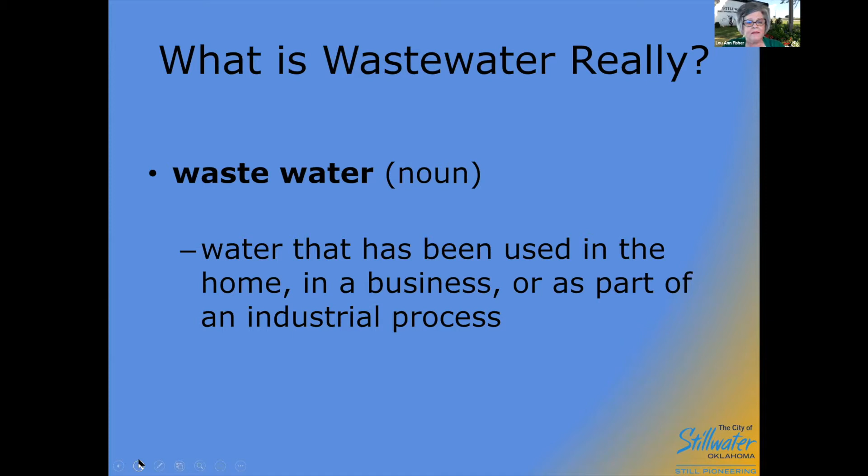Where does it come from? It comes from single-family homes, apartments, and any non-business. So it's divided into two categories, domestic and non-domestic. EPA considers domestic an exempt source of pollution, whereas non-domestic—small businesses, medical facilities, auto body shops, food services, photo processing industry—the list goes on and on.

They are considered to be a possible source of pollution, and there are rules and regulations put in place to govern their discharge to any municipality or waters of the state.

So where does it go? I think everybody's familiar with flushing the toilet, taking a shower, washing machine discharge.

Watering your lawn doesn't necessarily go to the wastewater collection system. It goes to the stormwater collection system. Some cities have combined sewer and stormwater systems, but Stillwater's is not. It goes into the collection system and then runs through different pipes all the way out to what we call a wastewater treatment plant.

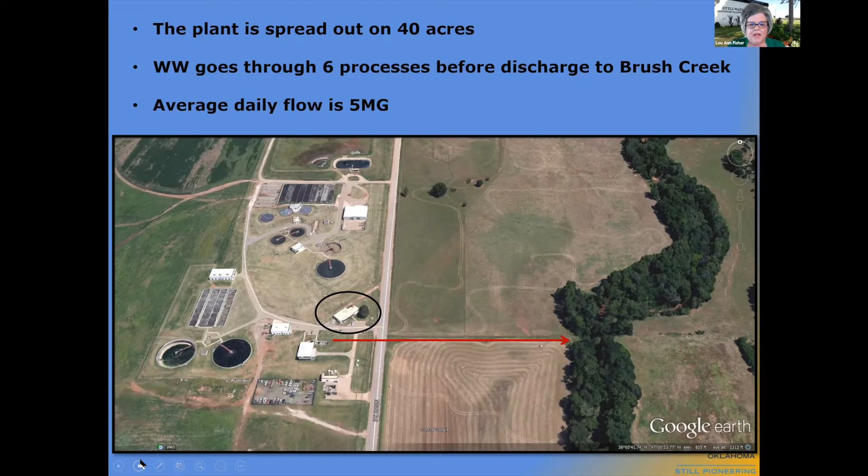Then the next thing would be the aeration tank. That's where all of the microbes are. That is the center of all the treatment processes—the most important. Well, they're all important, but that's the most important because that's where the bugs live. You might have heard me singing about the bugs being happy. The entire set of processes, the entire treatment train, is dependent upon those bugs being happy. When they're happy, there's a proper pH, a proper temperature, a proper amount of bugs of different types. And when it gets imbalanced, it starts acting up, and then the rest of the plant will also start acting up.

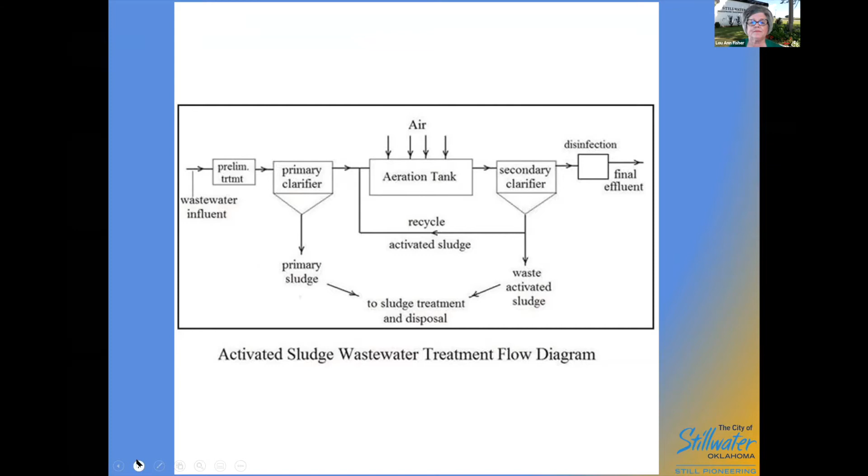Here's an aerial view. The two lines with the little black arrows are the pipes that come into the plant. One comes from the northeast and one from the southwest. The northeast is a 42-inch pipe and the southwest is a 36-inch pipe. They come into what we call the Headworks, which is the very first process that begins the train of processes.

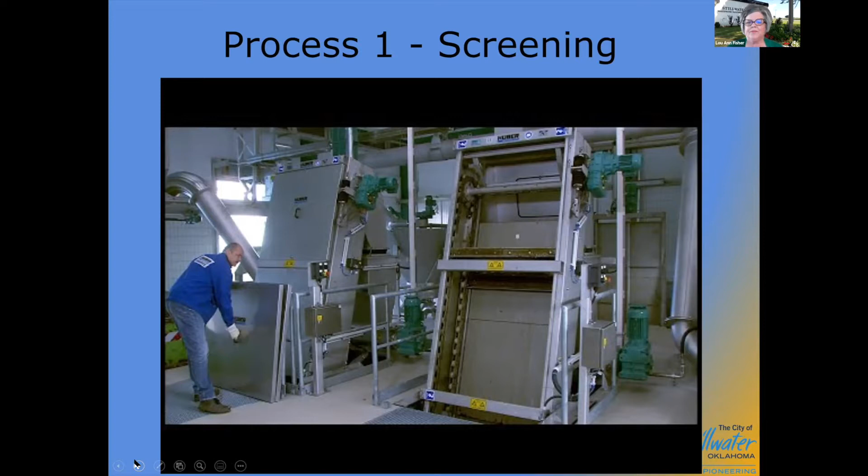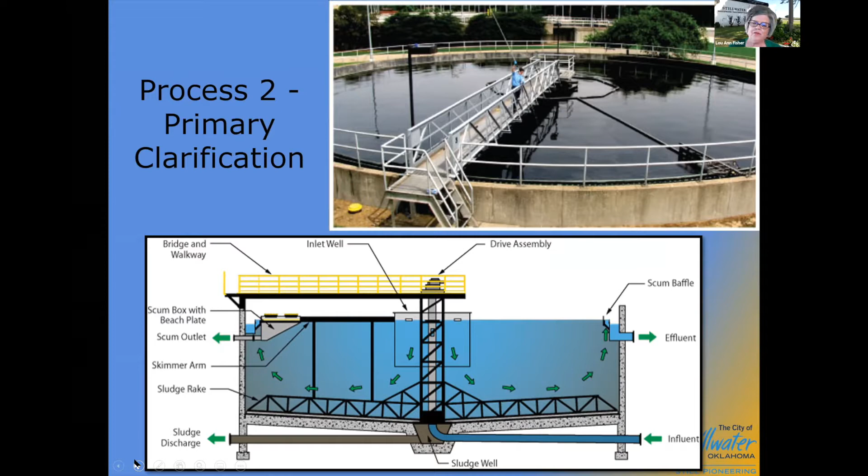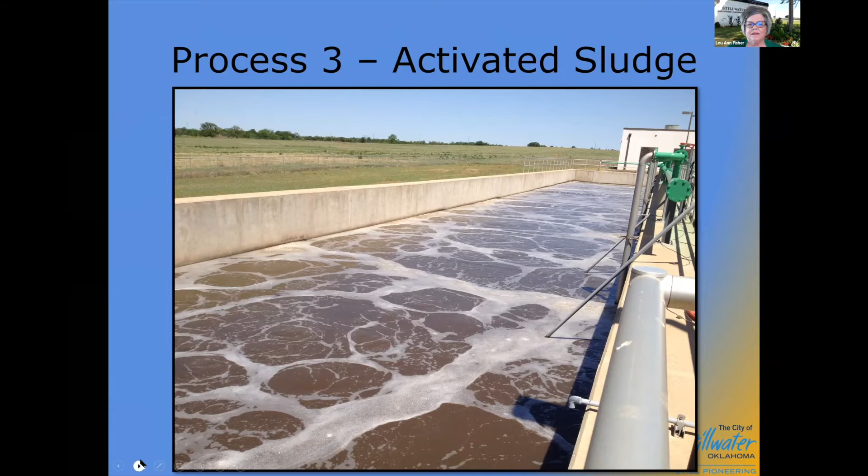Final clarification operates the same as primary clarification, except you keep a sludge blanket on the bottom, trying to keep it about 3 feet in height. It's kind of a buffer. So we have what we call return and waste activated sludge pumps—we'll draw out some of the old sludge and put in some of the new sludge. It's a continual process we do 24 hours a day, 365 days a year.

Next slide. Hey, Lou Ann. Yes. Can I pause you right there? We had a question that I think is important. All right, let's do it. Can you just quickly tell us what you mean by bugs?

Microbes—they're seen under the microscope. These microbes aren't new, added to the wastewater to do the treatment; they actually come from us. They're already in our system, and the processes that allow the water to be cleaned at the treatment plant use the same bugs that are already there coming into the plant. The trick is to keep a balance. There are 5 popular bugs that break down and process the waste, and it takes a certain balance. You don't want to get too heavy on stalked ciliates or too heavy on rotifers. You want an equal balance so they can work together as a team to break down the solids. Does that answer the question?

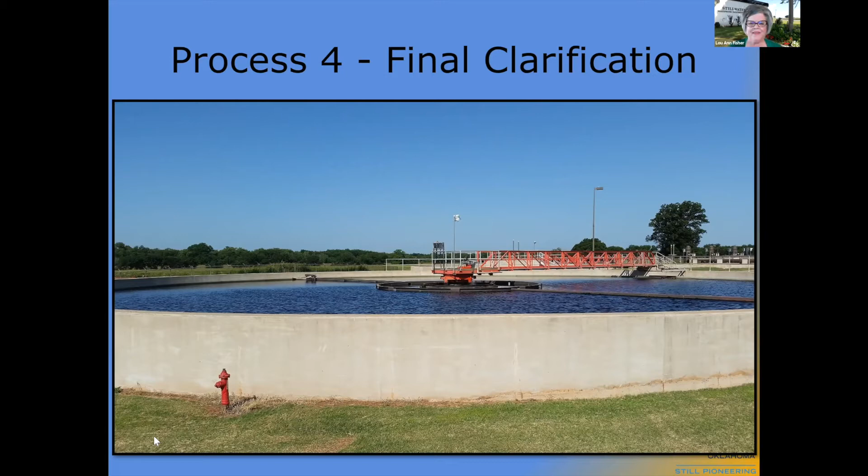Okay, all right then. So this is the last, well, not the last process, next to the last.

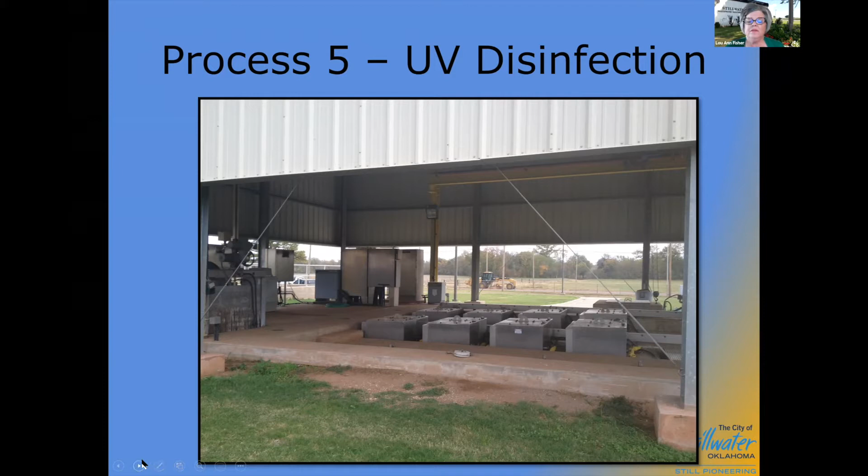These are the UV lamp units. There are 2 channels that the water flows through, and they get UV disinfection. The Stillwater plant was actually one of the first in the state to ever have UV disinfection. It's had UV disinfection since probably the 70s, which was something new at the time, rather than the chlorine gas treatment that disinfected the wastewater.

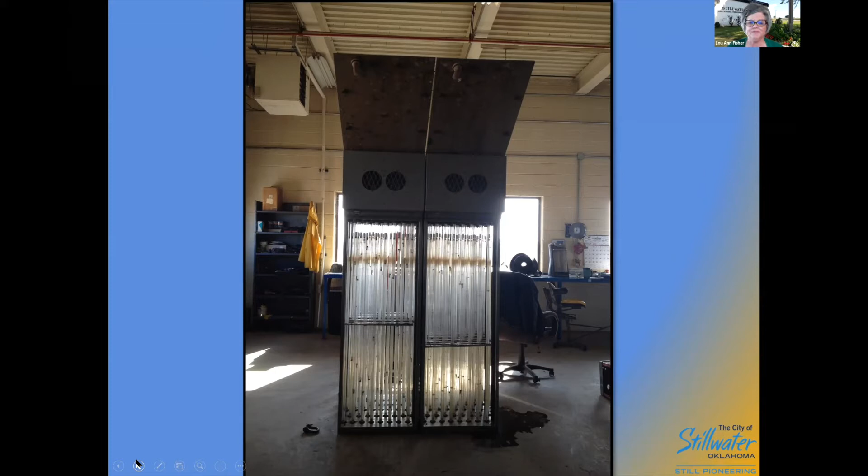And here it is pulled out of the channels. The Stillwater plant is only permitted to test for fecal matter, or E. coli, to the creek in the effluent water 5 months of the year. So after that time is up, we pull those units out one by one, take them to the shop, clean them, and check all of the electronics inside these boxes. You can see the lids flipped open toward us. We change the bulbs and get them ready for the next season, then put them back in and wait until the season starts again, which runs May through September.

That pipe goes straight out to the creek, to Brush Creek, which is tributary to Stillwater Creek. Stillwater Creek then winds up in Keystone and Texoma, whichever way the water flows, north to south. The importance of this being clean enough to drink is because it's someone else's drinking water downstream. So we want to make sure we send the cleanest water possible downstream to other users so they can treat it and drink it.

Our water treatment plant is north of town, and it comes from Kaw Lake. There are other users that discharge, and it makes its way to Kaw Lake. So everyone downstream of someone else is drinking someone else's treated wastewater. And that's where the recycling comes in.

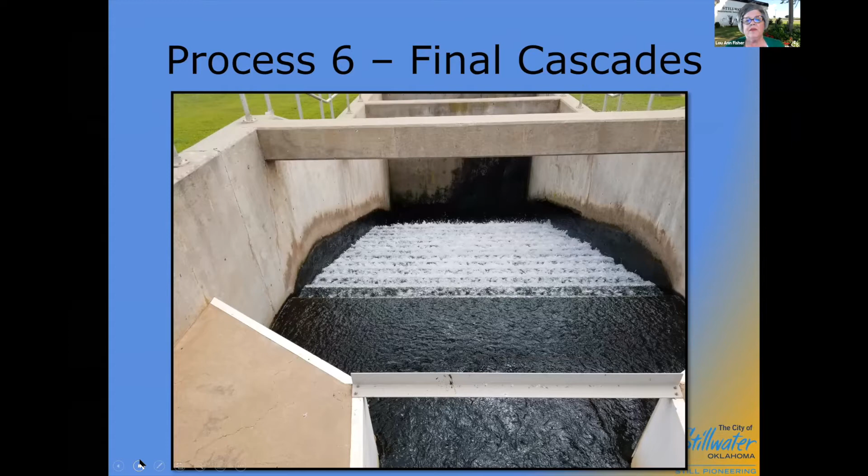And we rotate fields throughout the year. Once one field has been injected, it can't be used for at least another 30 days. You can't have animals on it, cows, you can't have people on it. So the access is restricted, and then we just move on to another field and do the same until we've rotated throughout all 5 designated fields.

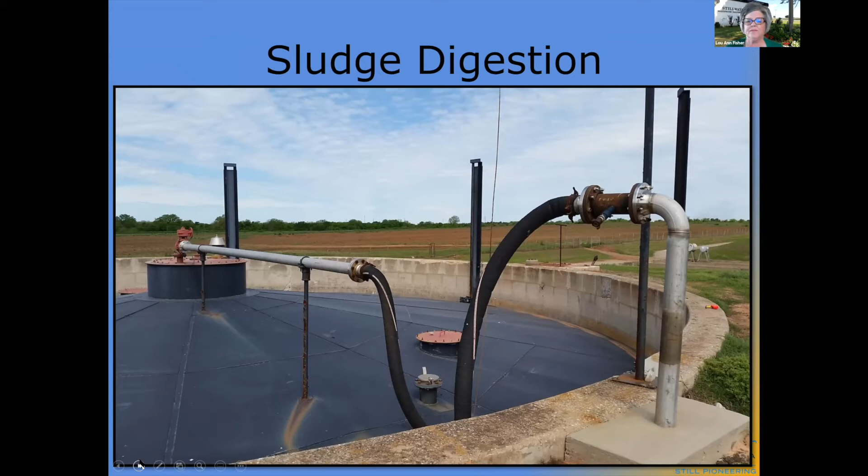You can see the plant and the acreage around it. Solids are settled out of 4 of the 6 processes. We don't pull solids out of the UV or the step aeration. There's 310 acres surrounding the plant for sludge injection. 7,884,000 gallons per year of wet sludge are injected into those fields. 562 dry tons, that's 1.2 million pounds, just to give you an idea of how much solids comes from the citizens of Stillwater.

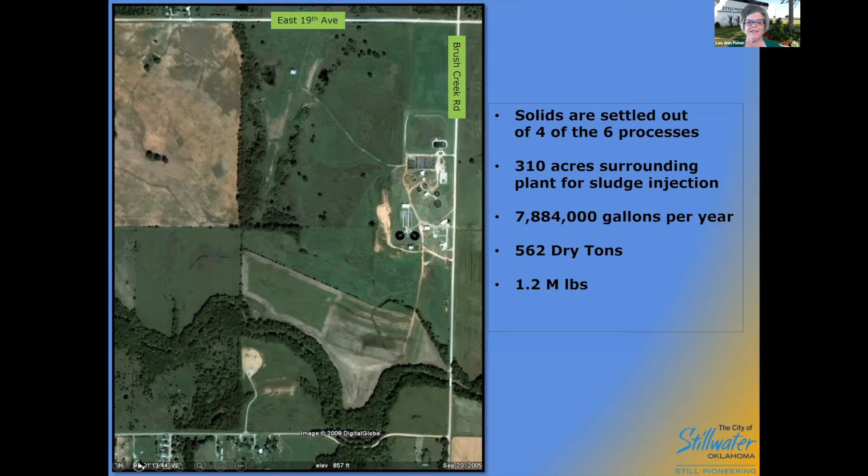So, what not to flush or put down the drain? Wipes are not flushable, no matter what the label says. I can go down the aisle of the store and see somebody getting ready to buy a packet, and I just can't help myself. I say, oh, by the way, those aren't flushable. And usually I get a, well, how do you know? Or what do you know? And I get the chance to get on the soapbox and tell them a little bit more about it. It's about the education. That's why we educate people.

Oh, well, here's a question. What happens with the soil in the injected fields? It grows a crop, we harvest a crop, and then we start all over again. The soil is not removed. It's just a nice, rich soil.

Someday, maybe we'll get to the point of composting it, and that's in the future. It's a pretty expensive thing to endeavor to take on.

So wipes, grease, utensils, female applicators - believe it or not, they float. Even though people think they're gone forever into a deep, dark hole, they do surface at the wastewater plant. Condoms, same thing.

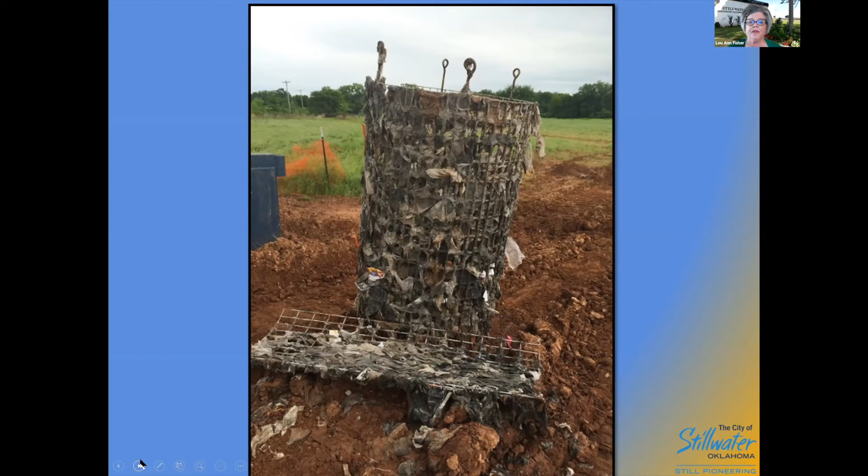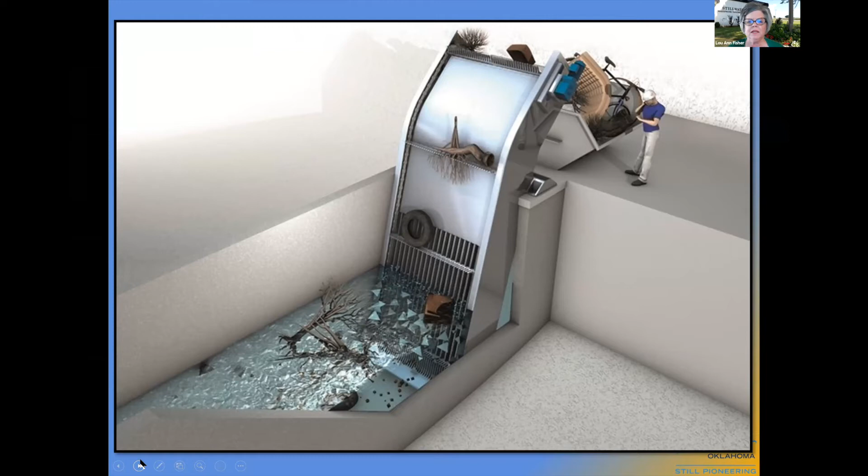Don't be shocked about the wipes. That's a question. It's a comment. Nice, thank you, spread the word.

Look in the middle, in the water, you can see those little white things - those are wipes. You can see how they get through, they just go right through. And look, there's a tire, there's a bicycle. And that operator is looking at that bin, and I think he's shaking his head, like oh man, I got to take these out of there. That stuff's been in the wastewater and you wonder, how does it get in there?

We have had clogged manholes and gone out at different times and it'd be full of construction debris. There's some new apartments going up and they have issues with their sewage backing up. We look in all the manholes around the area and there's pieces of 2x4s, gloves, a hard hat, all kinds of construction debris in there. These are not just dumping holes. What you put down the drain does go somewhere, and it goes to someone else after that. So think about that.

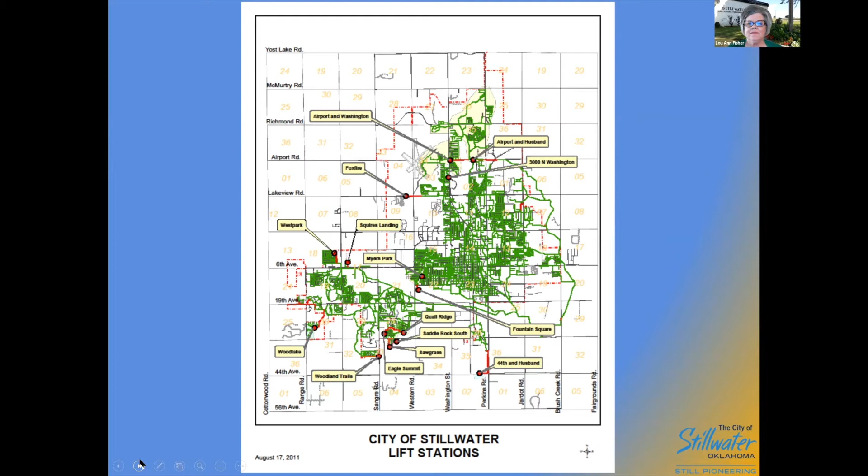This is just a joke, but maybe where you're going is not better than where you were.

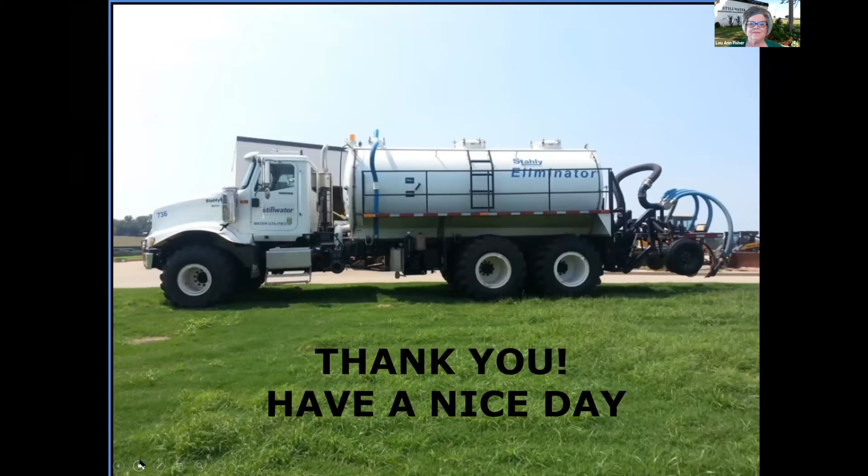This is the sludge truck, that 4,000 gallon tank, and it takes expertise to drive this thing. You have to be trained and signed off on by someone who's watched you drive it. There are only a few who know how to run this truck. You can see on the back those tubes, stainless steel injection tubes - I think there's 8 that have to be replaced regularly. Sometimes they'll pull up a rock or something and it'll dent it. But that's what goes into the ground, and it just kind of claws along, kind of like plowing. It does go pretty slow.

If there is one more slide - if there's not, I'd like to challenge you. One last thing, I'm going to give you a challenge. Let me change your mind about wastewater. It's not out of sight, out of mind. It doesn't go into a big hole somewhere or disappear. It does have a use, a very important use.

It comes back to us as drinking water. Therefore we educate - we educate users to understand the process of treatment and how we do our part to make a better world for future generations. If it's not on your agenda, I hope to impress you to put it there.